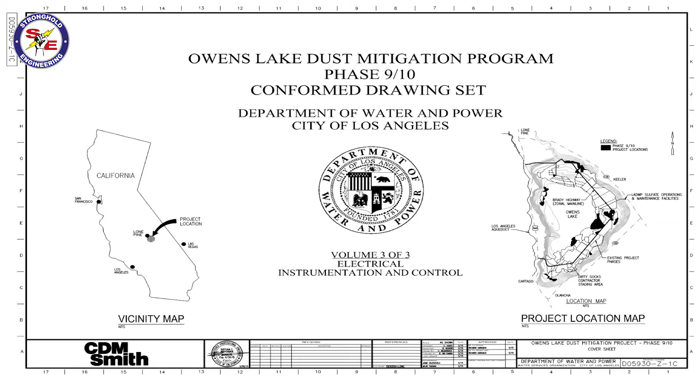This particular project, LADWP, Los Angeles Department of Water and Power, this is an ongoing, very interesting history behind this. Starting in the early 1920s, the city population of LA was around 200,000 people plus. So they were having a problem determining how they were going to get fresh water for the population of LA, because they knew that LA was going to continue to grow.

So what they elected to do was go up into Owens Valley, into Owens Lake, and they put in a water channel to basically take water from the Owens Lake and start supplying the LA area. As a result, it caused this lake basin to become a dry lake bed. Over time, that lake bed became so serious that the dust was actually sending dust particles as far as Japan.

So it was determined that the dust being created there was a health issue, and over a long exposure period of time, people were getting sick. So there was a major lawsuit in the 90s, and out of that came a mandated requirement by the courts that Los Angeles Department of Water and Power was required to take over the dust mitigation responsibilities of the lake. Since the early 2000s, LADWP has been slowly developing a dust mitigation control process for this lake. The phase we did was phase 9 and 10.

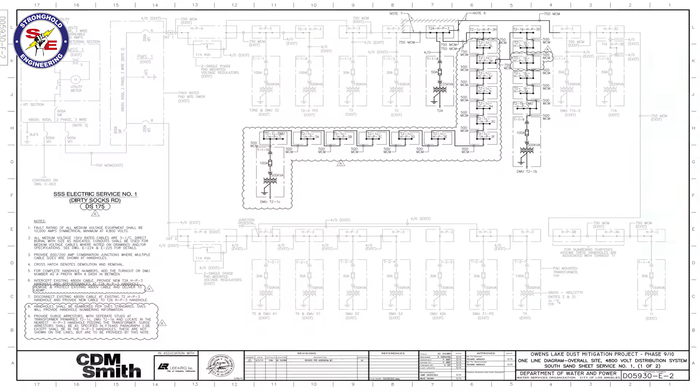These drawings are reflective of all the underground direct burial cable that we had to install on this project. There were various sites scattered throughout this project that required all of these underground duct banks and direct burial cable, and how everything is being installed through this entire lake. This particular feature right here is, right now, we had almost 17 miles of direct burial cable to install on this project.

So every one of these cables, as they route through the project, they all go to what they classify as load break junctions. So these are above ground handholds, and they have features on them that allow the cables to terminate onto a bus into these special above ground junction boxes. And so by doing that, it eliminates splices underground. So there's no cable splicing allowed underground. Everything is above ground.

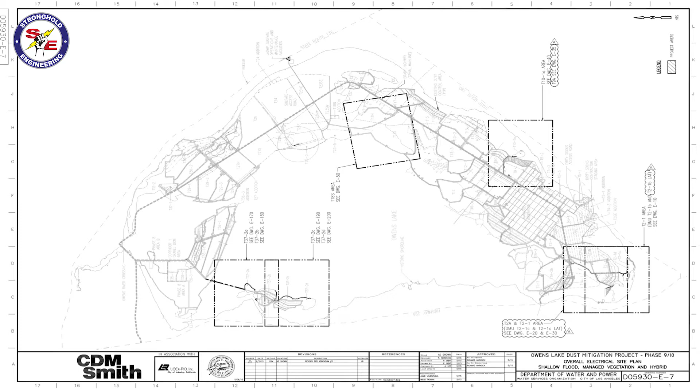These various areas represent the areas of responsibility of the expansion of this project. And as you can see, when you link all these together, you can see why there were so many miles of cable to travel between one location and the next.

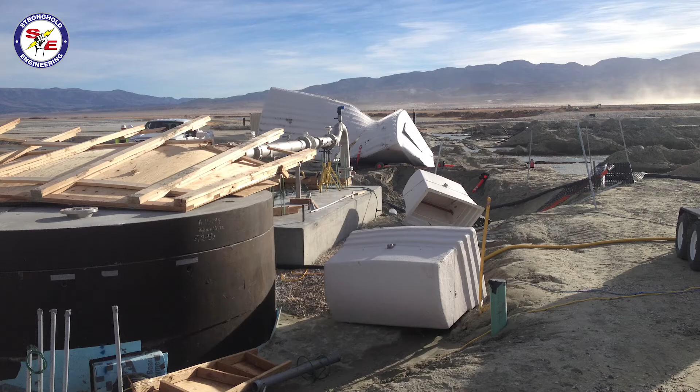Some of the challenges on the project were the winds up at the Owens Lake. The highest recorded winds during the course of the project were 110 miles an hour. This is one of the shelters; as you'll see later on, you'll get a better picture of what one of them looks like. But this is what happened in one night. It completely destroyed everything on the site. There was nothing left.

I talked before about how soft it is in some locations. Unfortunately, I don't have the photos of one particular site that, through the course of the project, started sinking. We thought they were going to completely remove the requirement of building and developing that particular site. Well, they decided not to. They didn't think it was going to sink anymore. So they went ahead and had everybody construct the site.

Unfortunately, I don't have a picture of it. I wish I did, because right now I'd like to have an update because it's almost gone. So they have a complete site that is disappearing into the lake bed. Wow. And we tried to warn them that this was going to happen, but they elected to proceed. So one of the areas that we fully developed as part of this project is soon to be disappeared and not to be seen again.

One of the practices throughout the course of this job, and one that we're using on the majority of all our projects, is developing prefab templates. All these plywood templates that you see with all the holes drilled in them are representative of eventual conduits that are going to be installed for particular pieces of equipment on these slabs. So when you look at these sites and the finished product that's out there, it doesn't look like there's much out there. Well, I'll let you be the judge.

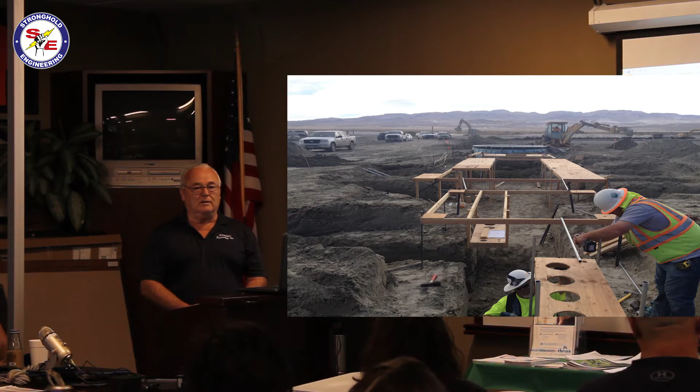So you can see dimensionally how they're laying everything out. It's a matter of, so that no matter the building itself eventually, because all the equipment has to sit over the top of all these conduits that stub up, and you'll see that later on also. The buildings, once they pour the slabs, the accuracy of this is, we virtually have zero tolerance. That's how accurate it has to be.

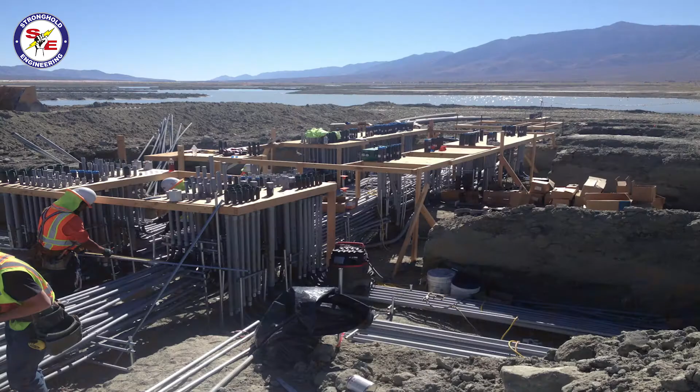This is one of the well sites. This particular one is going to have submersible pumps to go into it, and you can see the water table that we're having to deal with out there in the course of the project. That particular slab right there represents about 2 miles of conduit underneath that slab.

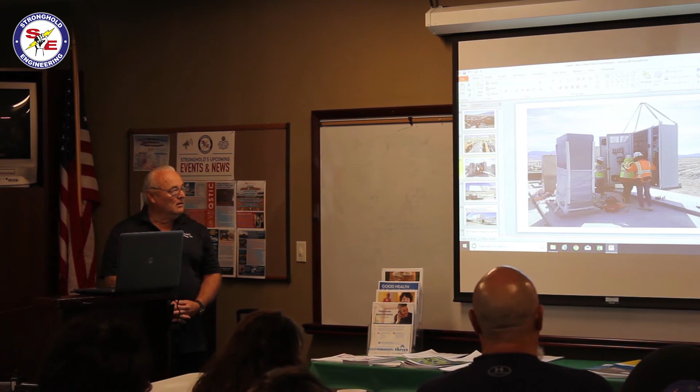Other controllers include switchgear, the flow indicators for transmitters, for all the flow meter controls and everything for the functionality. Once the gear is set, this is what one of the shelters looks like when they're actually maneuvering the shelter to go into place.

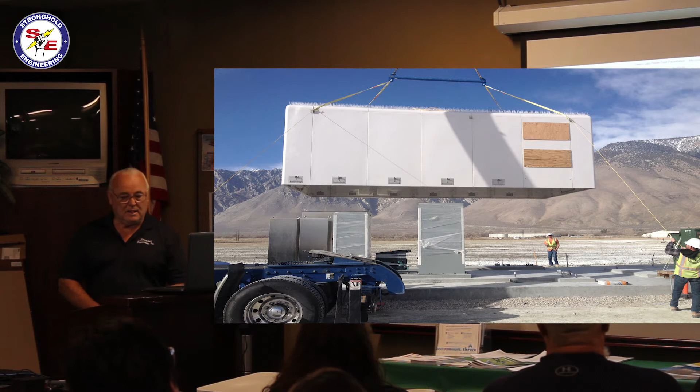This particular project, I would do this so that hopefully Beverly would be here today so we could get special recognition for this. This project was a true representation of the core policies of this company. The quality of the work, which you saw earlier, is very representative on this project. The safety on this project, we had 45,030 man-hours worked on this project with no recordable lost time incidents.

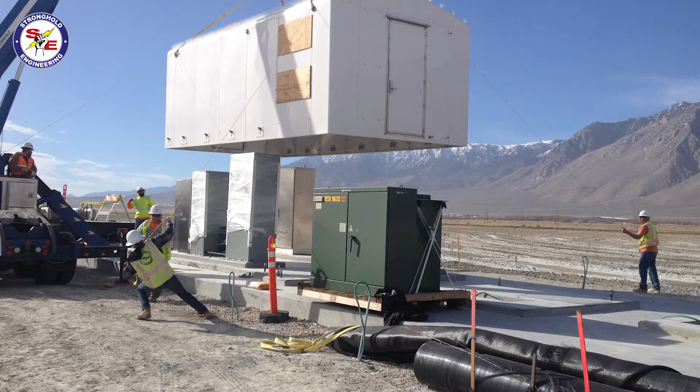Teamwork. As you can see in this photo, teamwork is a must. Everybody has a job to do. Everybody has a task to perform. And in order to pull this off, you can see how many guys are involved in setting that shelter. You can see how many people were involved in setting the equipment within the shelters. Steve Thomas did an incredible job.

Unfortunately, the field does not always get the recognition that they should. It's easy for us to get some recognition in here because we're more in the limelight than they are. But make no mistake that the personnel that work for this company represent this company in the best way. Integrity. It goes without saying that every employee that I've ever met working for this company has without a doubt the strongest integrity of any company I've ever seen.

Commitment. I hope moving forward from this day and from here on that the commitment that this company is pursuing is of the highest standard in the industry.

Our biggest challenge in this project was Craig Barnes. He was a senior LADWP electrical engineer overseeing this project. And of all the people that I've ever met and come to work with in all the years I've been in this industry, he was by far the most challenging. But as a result, this was a performance review that he did for us to help us qualify for another project.

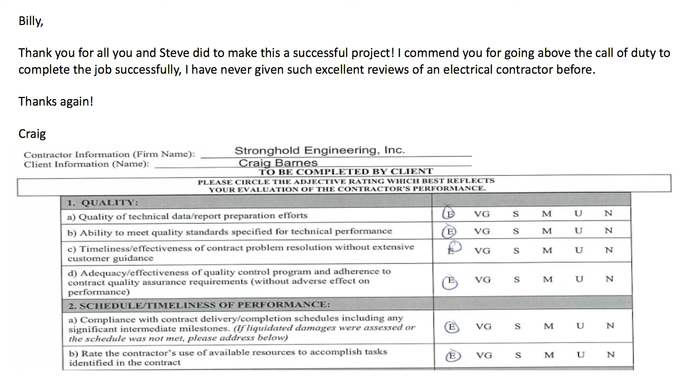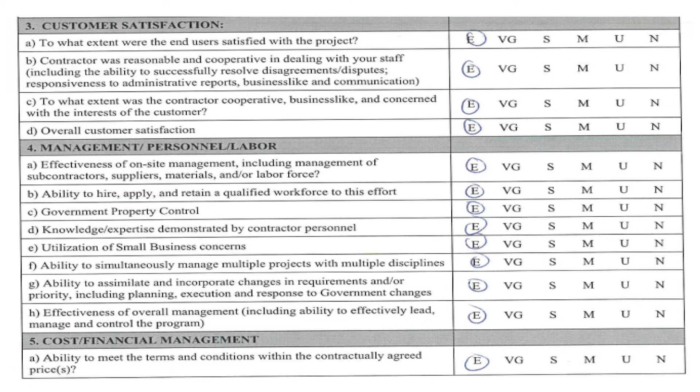And the top part of this was special thanks to Steve, myself, and the team for everything that we did. And in all the years that he's been with LADWP, not one time has he ever given a recommendation for any contractor. So that's pretty special. And as you can see, he gave us an excellent all the way across the board.

And actually, how did we do on that job? Did we qualify for that? We still have 6 months. What's that? We still have 6 months for them to review it. Okay. Well, hopefully that'll all pay off.

So, last but not least, I personally want to thank Beverly and Scott for doing something that is so rare in this industry, and I mean this from the bottom of my heart. This is the finest company I've ever worked for, and I've worked for a lot of them. It takes a long time for a company to develop its image and who they are and what they are. And I don't know how you guys pulled it off, but you have done exceptional, for sure.

And the team of people that's here today, I've come to know every one of you personally. I've come to know you in the business place, and it's an honor and a true respect from me to work with you. I look forward to everything we move forward on and to try to achieve everything the best we can and do the best job that we can. That's it.